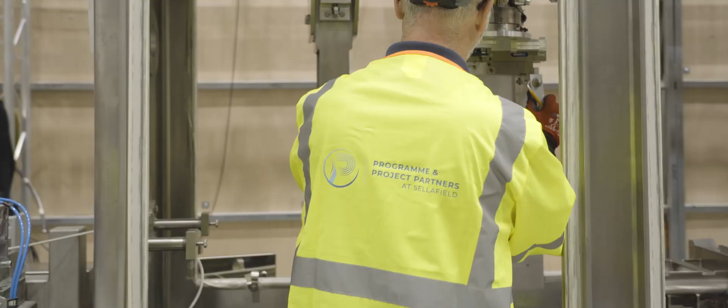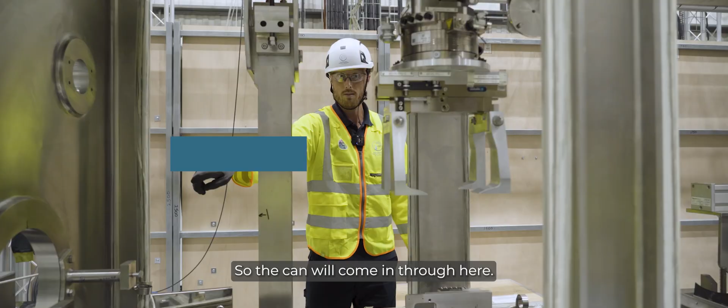So there's two process lines at NIS, the 400 and the 410. One's for repackaging Thorpe waste and one's for repackaging Magnox waste. So the can will come in through here. You've got the pick and place, which starts with collecting the can, and that will deposit the can at each plant item along a 10-metre axis along the full glove box line at different points.

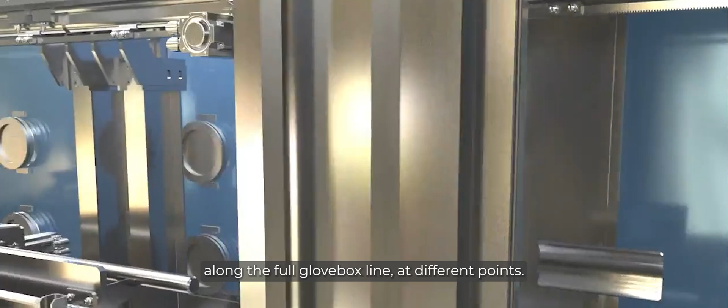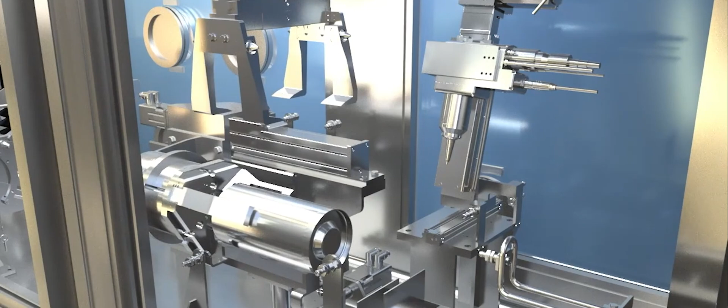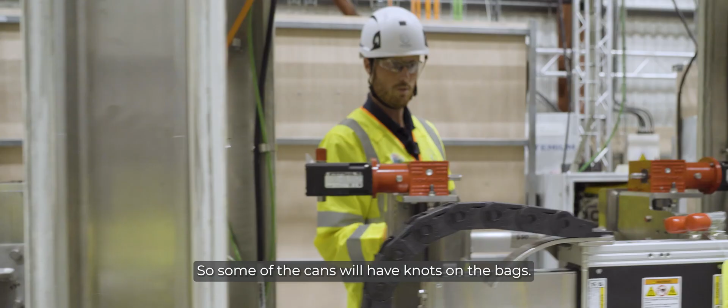You've got the buffer storage. You've got the laser cutting station, which removes the lid from the can. You've then got the knot removal, so some of the cans will have knots on the bags. This is for removing the knots.

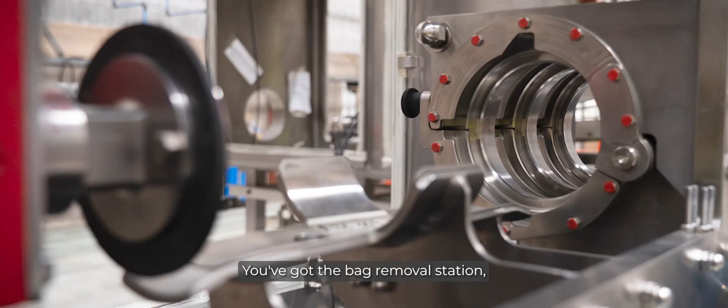You then move down to the can extraction station, so the can gets clamped in. You've got the bag removal station, so the can goes through there with the bag, through the brushes, removing any waste that's left over. You've also got a manual bag removal in case this doesn't work. You can get your hands in through the glove box.

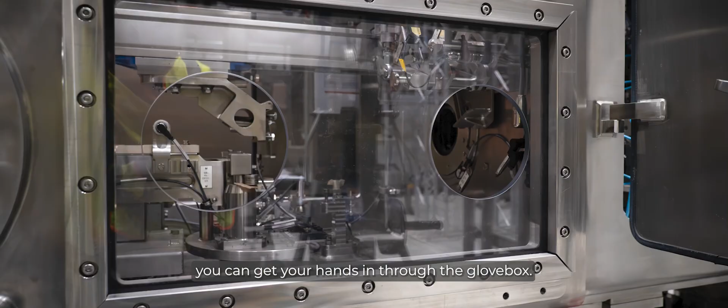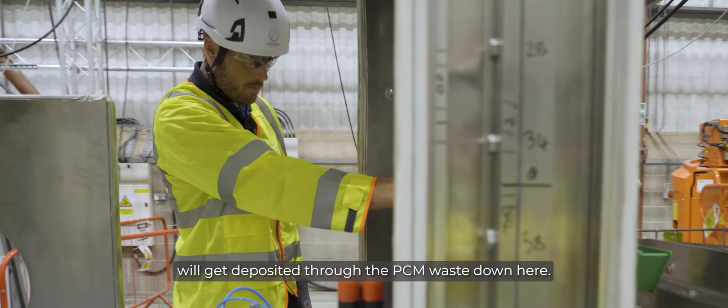Moving down again, you've got the can lid retorque station and coif removal. Some of the cans will have coifs on, they get removed here and then retorqued with the new lid. Any PCM waste that gets put through will get deposited through the PCM waste down here, goes all the way out.

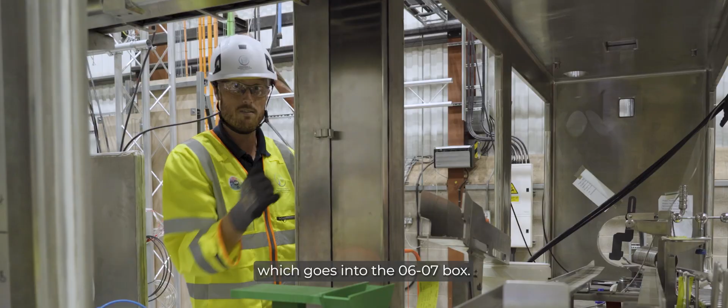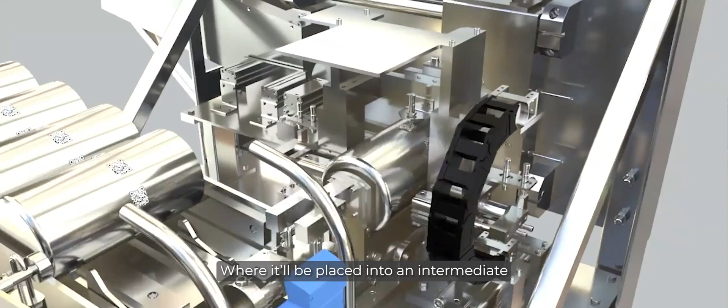And then you've finally got the can transfer system, which goes into the 0607 box. So once the inner can has been knot removed, bag removed and lid retorqued, it'll be pushed into the 06-07 box, where it'll be placed into an intermediate can and a lid will be placed on top. That's where it'll be welded shut and then cut, and then it'll be transferred to 408.

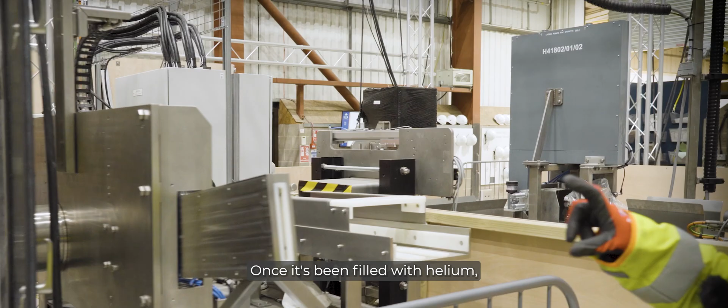It'll be pushed into a 100-year package, lid put on and then filled with helium. Once it's been filled with helium, it'll go to the TIG welder, where it'll be welded shut. And it'll go to an integrity check, which will check if there's any helium leaks. It'll then go to a contamination swab, where it'll be swabbed and then it'll be exported to be stored elsewhere.

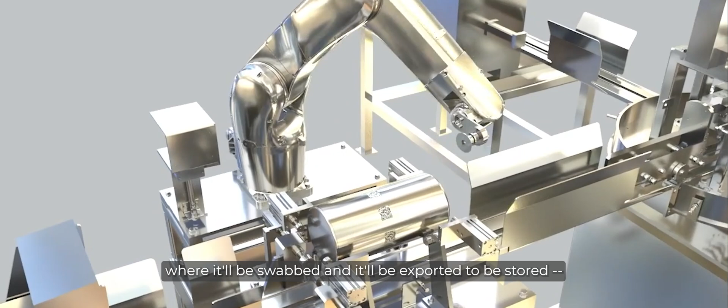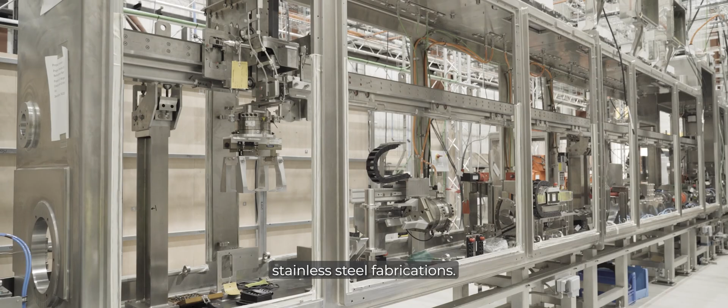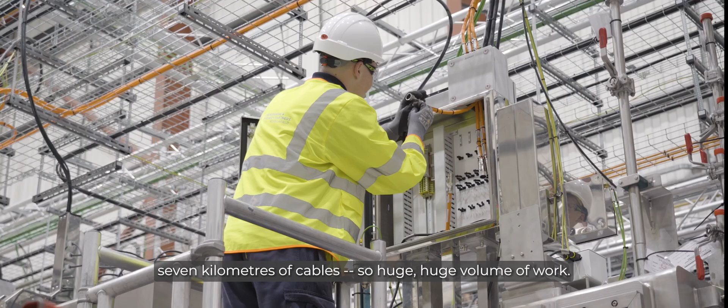Okay, so in terms of manufacture, we've got two process lines. They're made up of 8 glove box containments, which are the kind of high integrity stainless steel fabrications. They're made up of 18 individual pieces. In terms of the process system itself, that's made up of 3,000 manufactured components, 1,800 electrical components, 7 kilometers of cables. So a huge volume of work.

The glove box containments themselves are technically challenging. There's very little material that's left once these fabrications are complete. So to provide a compliant product is a credit to the craftsmanship that we've got internally.

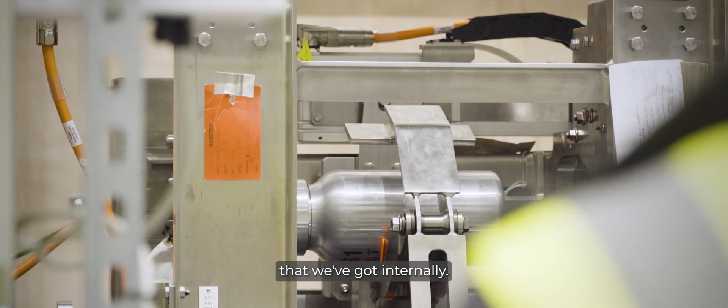So I think one of the challenges of commissioning something like this, which is one of a kind, is there's not much OPEX. It's kind of the first that's been done. I know when I first came down here, this warehouse was empty. The first test we did was leak testing the glove boxes, mill plant items, just making sure that they can actually hold the gases that are required.

And then you start looking at the actual testing of the plant items, as well as setting up this facility, setting up the porta cabins, setting up the welfare facility, setting up the actual equipment. Really challenging. There's kind of no handbook on how to do it. You just work collaboratively together, and I think that's one of the main reasons how we've managed to work so well. It's definitely been challenging over the last few months getting to this point.

I think as we go, the OPEX will be shared between ourselves and Sellafield back to site. There'll be many lessons learned, but I think the biggest lessons will be when we're testing. During the testing, it may change not how we test, but the way the testing works on site. I think that the biggest lessons will be learned during testing.

It's like a big thing for nuclear, obviously nuclear safety as well. And also it's the first that this has ever been done. You're getting a lot of exposure to various different bits of kit that you maybe wouldn't get anywhere else.